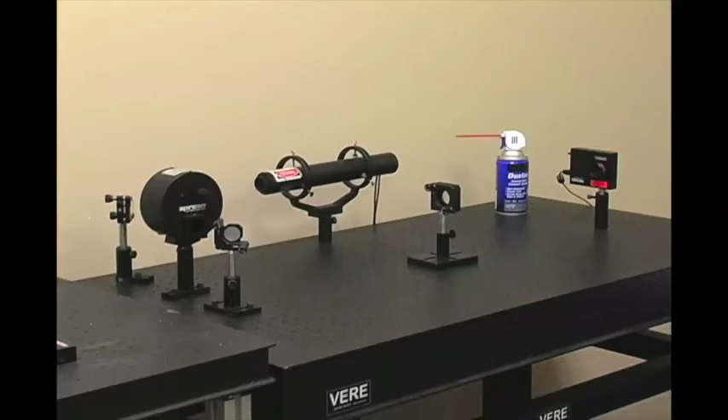Now that we've got our optical table all set up, the camera is aligned with the laser. We've got a lens in there to make sure we have a good focal spot. Now let's get our software installed.

Going back to the box that we received the camera in, we have our installation CD. When you open up the envelope, you have all the instructions necessary to install it. But it's really quite simple - all we need to do is insert the CD into our CD-ROM.

When we insert the CD into our CD-ROM, we will see the Spiricon software auto install application. If the autoplay on your system is not enabled, browse to your CD-ROM drive and run amplayer.exe.

Within the auto installer, we have a lot of different features that we've provided for you, such as our catalog, product manuals, and customer service information. With one click on Software Installer, this is going to install all of the software provided on your CD, depending on which products you purchased.

Today we're going to be using BeamGage Standard version 5.5. We're going to see a couple camera drivers install first, and then we're going to see BeamGage. BeamGage does require the .NET Framework 3.5 Service Pack 1.

If during installation you're prompted to install any drivers, this is normal. I'm going to click Install there, and then also here for the two different Lumenera camera models we support. Then we have the PyroCam 3 camera driver installation.

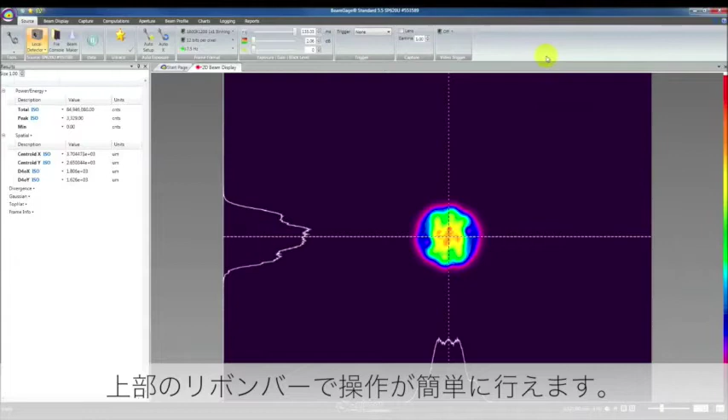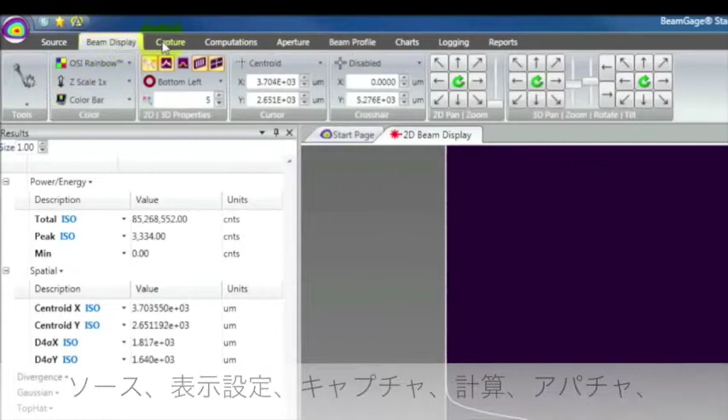The most prominent thing that we're going to see in BeamGage is the gray bar along the top. This is called the ribbon system. The ribbon system gives the user a unified control scheme. All of the controls are located in the same spot, but this bar changes depending on what the user is trying to do. For example, if we click on one of these tabs along the top, such as beam display, computations, or logging, the entire ribbon updates with the controls relevant to that task.

Also on the source tab, we see the different sources that we can use, such as Beam Maker, File Playback Console, or our local detector. In BeamGage Enterprise, we also have the network detector, where we can use our cameras over the network.

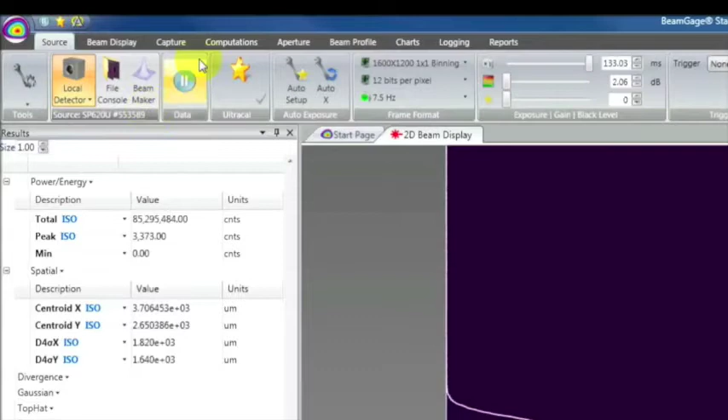The next thing is the display windows. The display windows in BeamGage use most of the display space, and you enable or disable windows through the Tools menu on the ribbon. The Tools menu is always present for any of the ribbons.

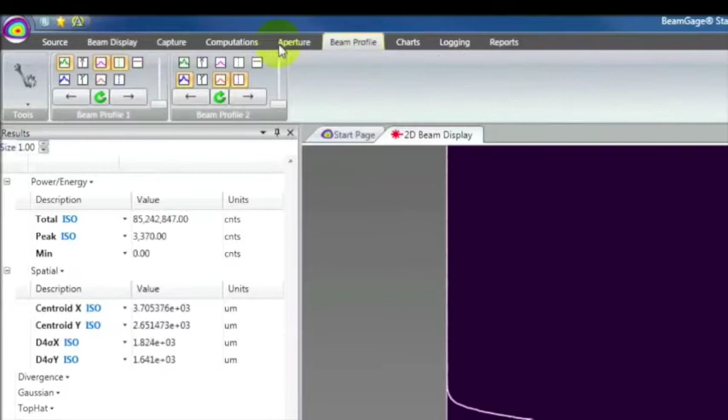Depending on which topic you're on, such as beam display, you'll have different options available. In this Tools menu, we have 3 different display windows, and we can also disable the ribbon bars to reduce the complexity of the user interface.

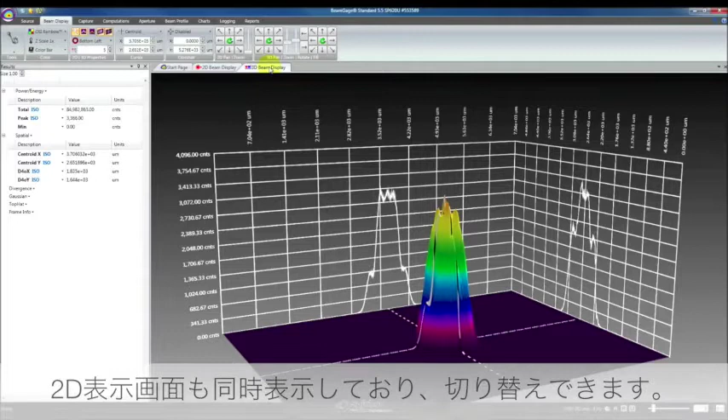Right now we're just going to enable the 3D beam display, but we also want to be able to see both the 2D and the 3D at the same time. If we double click this tab, that window will pop off to a floating window.

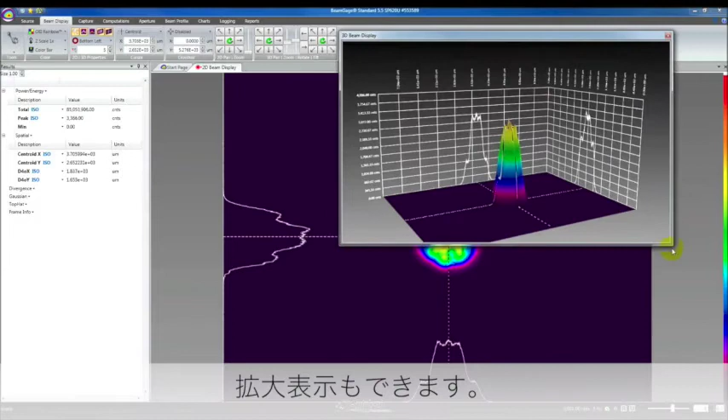Floating windows are really nice because they can be put anywhere you want, especially on multiple displays. If you have 2, 3, or 4 displays, you can make the BeamGage interface as versatile as you need it to be. Right now, though, we're just going to dock this window.

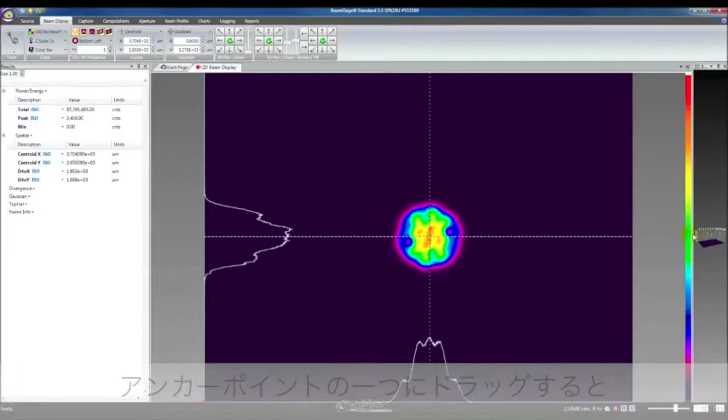When I grab it and move it around, we can see various anchor points pop up on the screen. If I drag my mouse to one of those anchor points, the highlighted area will shift, and that's where my window will end up. From there, I can resize that docking area however I need.

Let's go ahead and we'll also add in a beam stability window below my results over here, using the same manner.

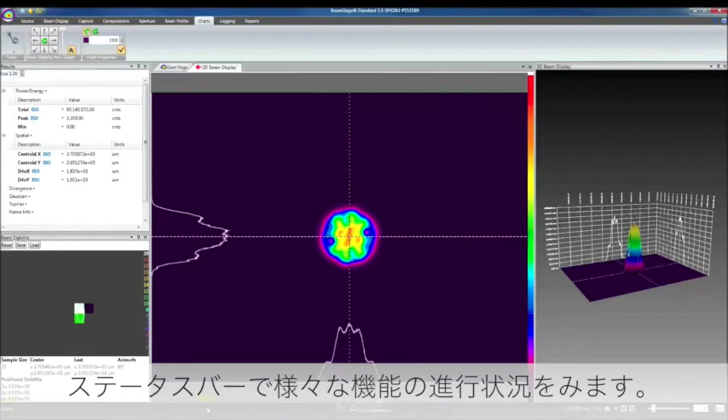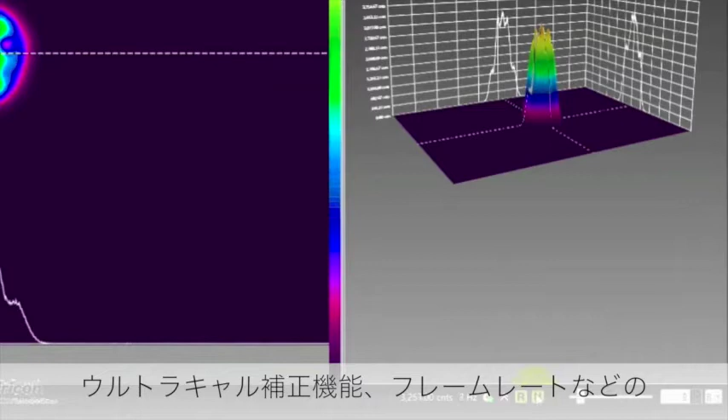The next thing we're going to look at is the status bar. The status bar gives both general information about the status of BeamGage and also specific information about certain features, such as ultracal subtraction, our frame rate, our data collection subscription, and our frame buffer.

Users of LBA will notice that the frame buffer looks similar, but we've also provided a more user-friendly way to manipulate the frame buffer.

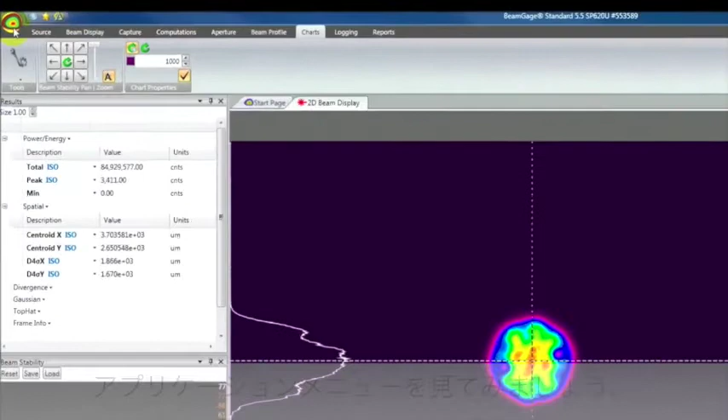Next, we're going to look at the application menu. It's found by the round button in the top left corner. When clicking that, this gives us the functions to load and save setups, load and save data, export in a variety of file formats, queue print jobs, and then also load any recent setup files that we've used for easy access.

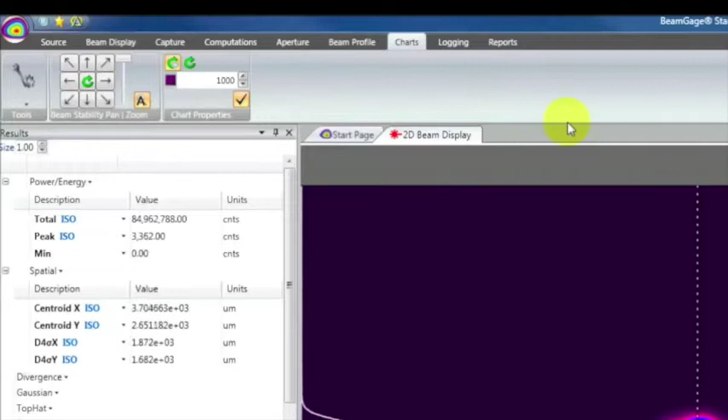The last thing that we want to touch on in BeamGage is the help system. In BeamGage, we've supplied two main help modes that allow beginning users to really get acquainted with your BeamGage system. The first is just help. This is the BeamGage user manual, and it opens up our comprehensive PDF user guide.

All sorts of really great information in there. While it does have a lot of information and is long, it is invaluable. One of the great things we can do is actually using the next feature.

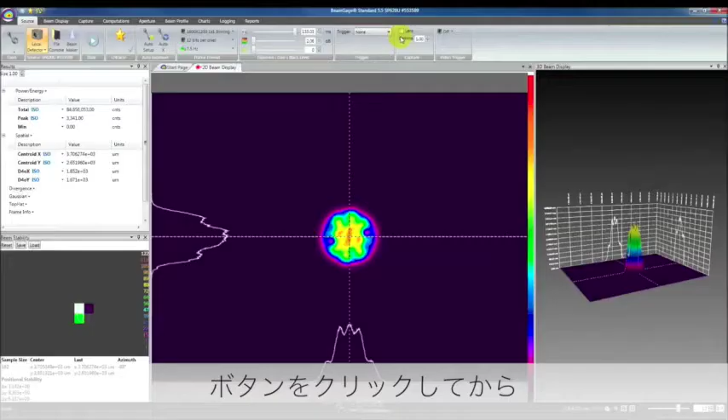The next feature is called What's This. LBA users will recognize this. If we click on this button and then click on any feature within the application, we'll be taken to the spot in the user guide that corresponds. Now we can read up all about beam stability. For example, if we click on the frame format, we get taken to the spot in the user guide about file formats, or frame formats, and so on.

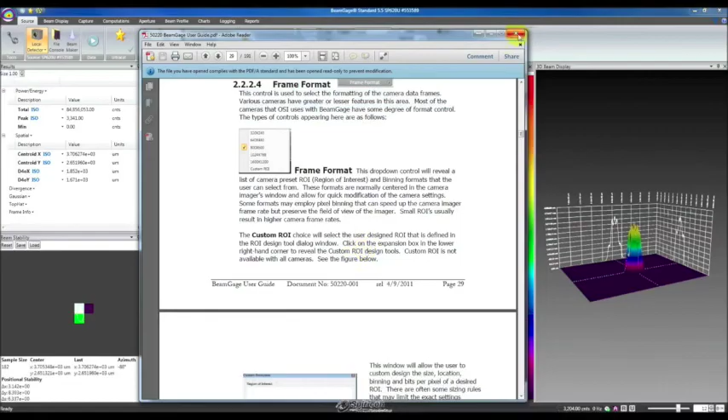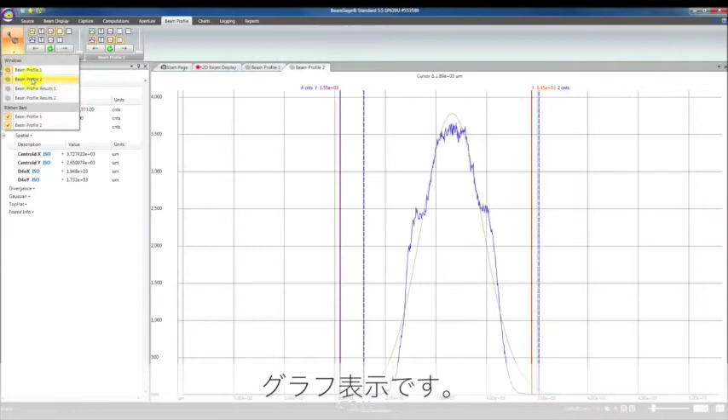Let's go ahead and close the 2D beam display. We're going to enable beam profile graphs in both the X and Y axes. And then we also want to chart our beam width results for D4 sigma X and Y.

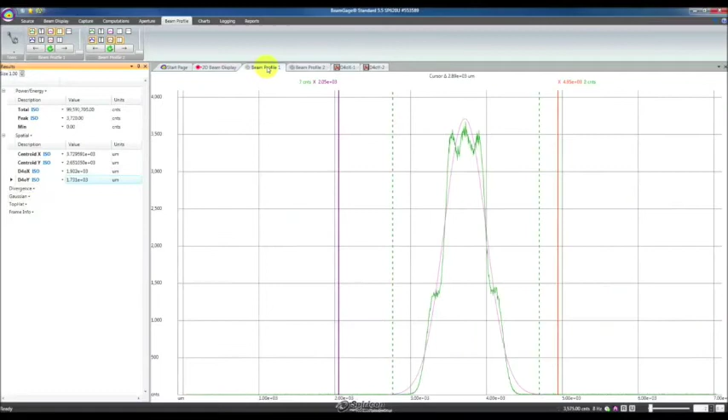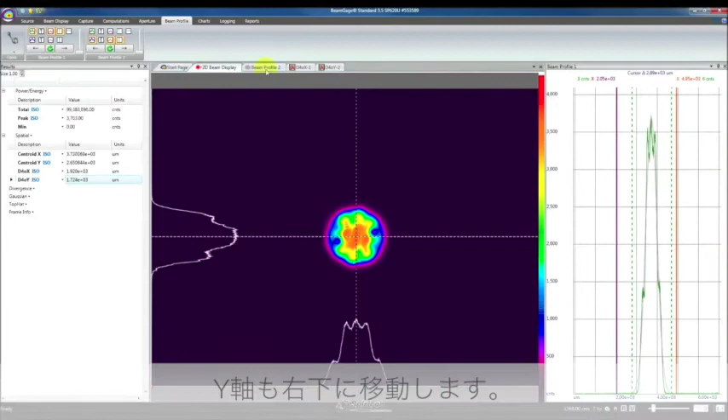By double-clicking this tab up here, we can pop that display window to a floating window and dock it on the right side. And we'll stick the y-axis on the bottom there. I'm going to do a similar thing on the left-hand side using our result charts, and squish them back down just a little bit so that we can still see all of our enabled results.

The next thing we need to do is enable an aperture to restrict the data that's being used to compute the beam widths. The first one we'll use is actually just a display aperture and doesn't affect analysis. This allows you to see how big your beam is currently being computed.

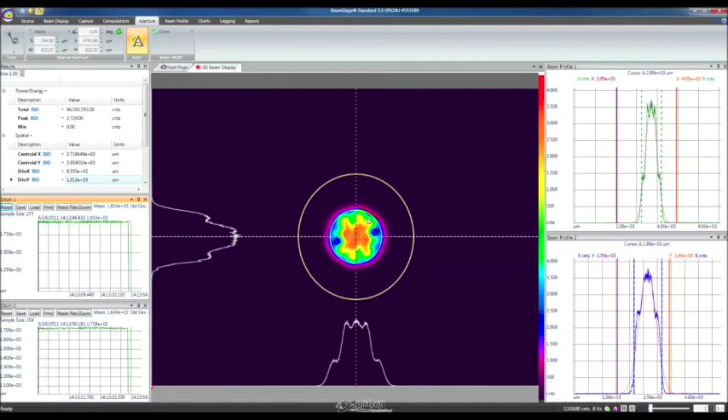We're going to use the auto aperture to actually restrict the data being used, and we see our beam width aperture is displaying a much more realistic beam width. And we can also use a manual aperture to restrict some of that even further.

The auto aperture is really good for beams, especially if they have a shift to them, if they're wandering, things like that, then it'll move with it. In some cases, it does work best to use both apertures. We want to use that manual aperture about 2 times the current width of the beam.

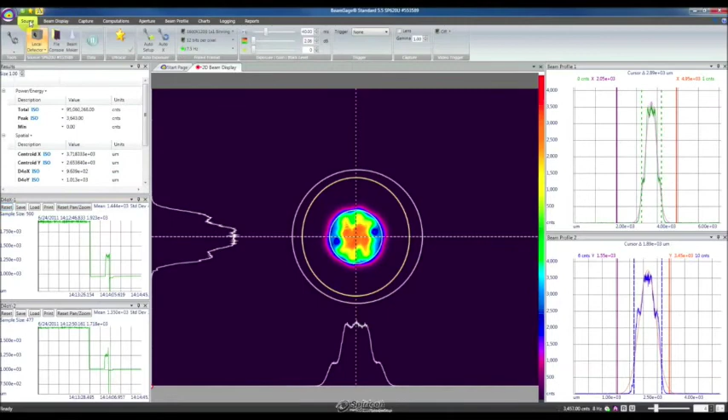Okay, at this point we are collecting fairly close values. This is pretty close to, if you look over here, that's pretty close to the historical numbers for this laser, but still not quite. What we really need is to do a background calibration.

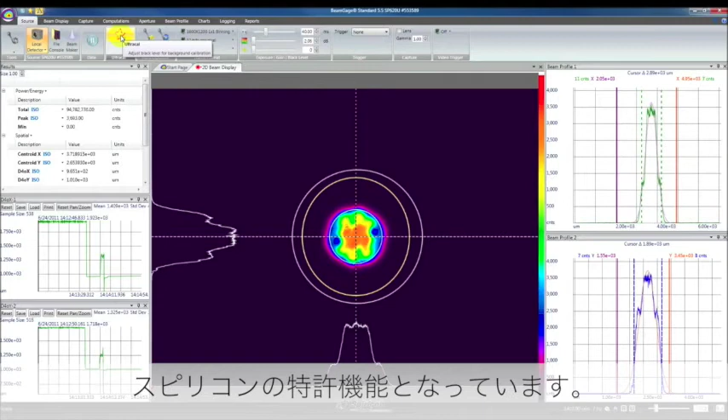We're going to use UltraCal, which is Spiricon's patented background calibration process, and it's pretty easy to use. We'll just do a single click on the button. It starts the process, generates a signal to noise ratio, and then it wants us to block the beam.

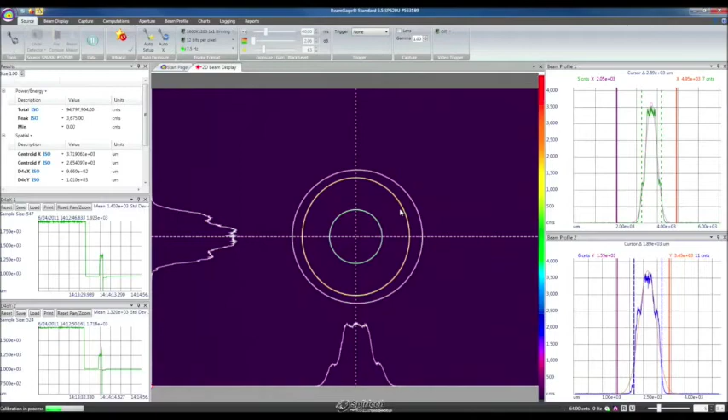It automatically takes care of the message and continues the calibration process when we block the beam. And depending on your camera's current frame rate, the calibration will complete very quickly.

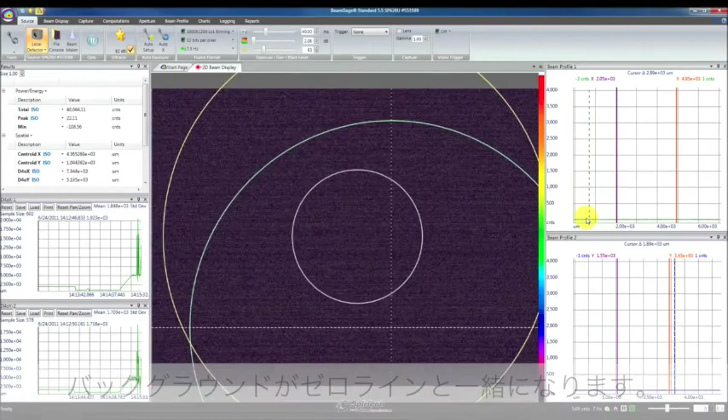At this point, our background is calibrated correctly. We can see that in our 1D profiles that our background actually matches the 0 line. There we go. Now it's actually sucked down there. And our beam width aperture is actually tightened up just a little bit more than before.

We'll reset our charts to start collecting only the current data. And if we want to, we can enable statistics by enabling it in the results group. We'll enable mean and standard deviation for the power energy group. Now, since the stats, we don't want just any data in there, we need to stop it before we enable the statistics. We're going to set a running window of 16 frames, the size of our current frame buffer.

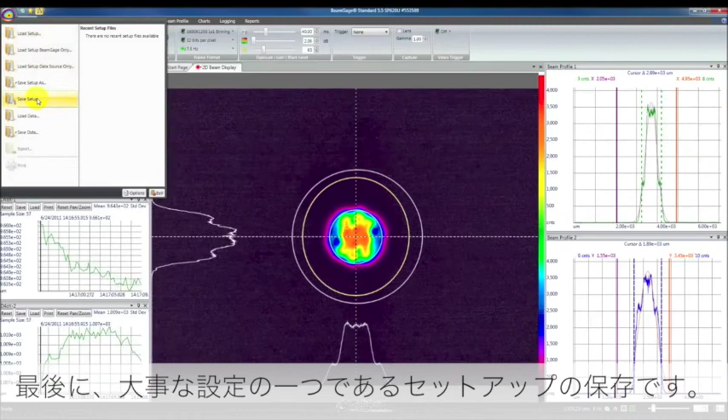And when we start that, now we're collecting our statistics. Now the last thing, and one of the most important things we're going to do, is actually save the setup. It's very frustrating to go through all the work of configuring BeamGage and then forget to save your setup.

And call it sample. And there we go. You can see up in the title bar that we are now running with sample.bg setup.

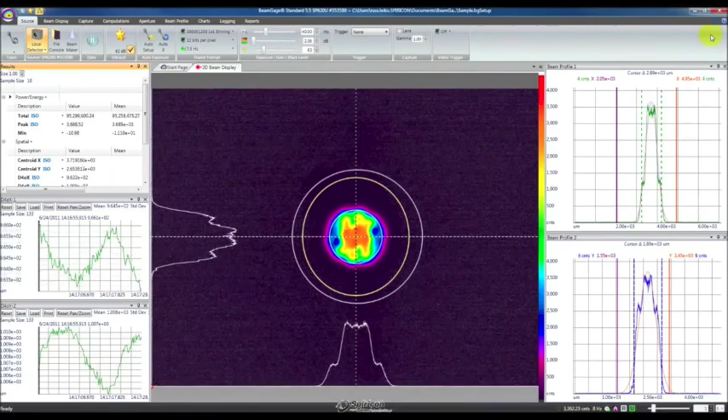This concludes this training video. We hope you enjoy using BeamGage.